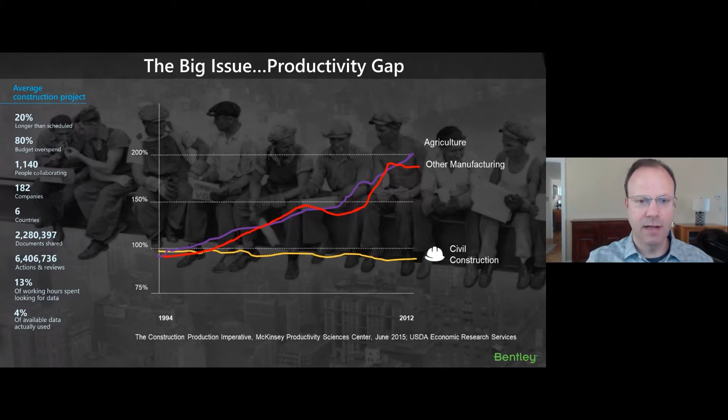Before I get into that, I'd like to start with what are the big problems in construction, specifically the demand for infrastructure continuing to expand. However, the construction industry is really still struggling to keep up, largely due to the lack of productivity we've seen. Many people may have seen this McKinsey slide before, but as it shows, while other industries, particularly manufacturing, have seen step function improvements in productivity over the last 25 years, construction has basically seen no gains. It's clear that much of the productivity gains seen in other industries is driven by new processes enabled through the adoption of technology. So we want to see that happen in construction as well.

If I go a little deeper into that productivity gap for construction, it's driven by three things. First, project complexity, which includes the increase in design complexity, as well as infrastructure projects getting bigger and more complex in size. But also, and maybe even more importantly, while this is happening, there's an increase in owners' delivery expectations. It's not good enough just to deliver more for less, but it needs to be sustainable, accountable, transparent, resilient. And then resources continue to be an issue in terms of labor, skilled labor, as well as materials, and in the heavy civil space, large capital equipment utilization.

And finally, around data deficiencies, which are driven by two things. First, data silos, where we see about 30% of construction companies using applications that don't talk with one another, and also poor data quality, where 90% of the data is not structured, which makes it really hard to search for and unusable for analytics. The net of all of that is, while there's more and more data being made available for construction, only about 4% of that data is currently used, and the average construction firm spends about half a day a week just looking for it so they can do their jobs.

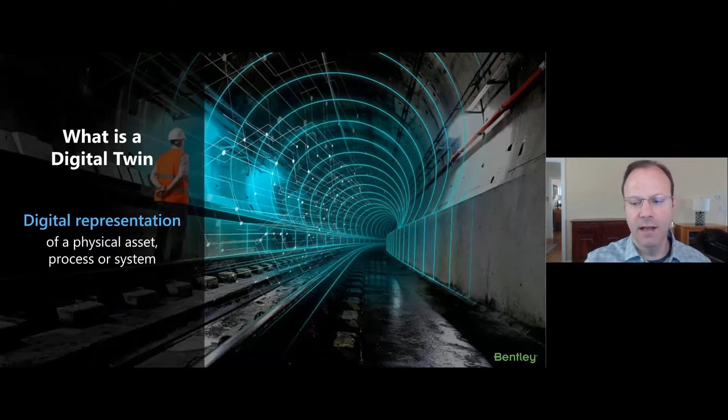Let's start by defining what a digital twin is. There are probably other definitions out there, but the way we look at it: first, it's a digital representation of a physical asset, process, or system, and all the engineering information that goes with that representation, so we can better understand it and model its performance.

Second, once you have that model or digital twin, it could be continuously synchronized from multiple sources, including sensors, continuous survey from the field, and near real-time status, so you can understand what is happening in near real time. If you're familiar with BIM or VDC, this is taking that the next step further and having a live BIM model for construction.

And last, once you've got this digital twin, it enables data-driven workflows, including asset visualization, progress tracking in the field, performance analysis and insights, in order to predict and optimize better project outcomes.

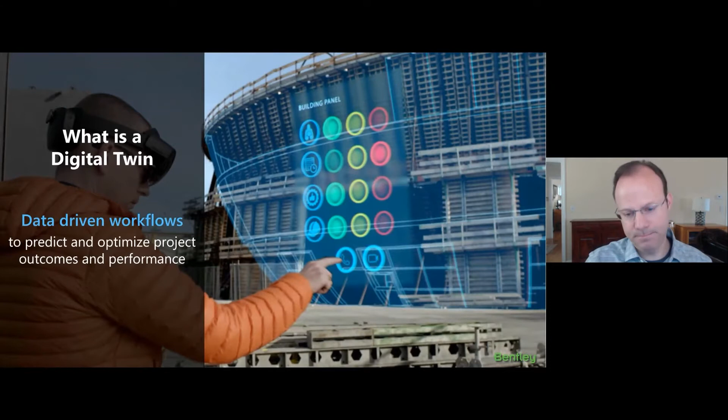So let's start to review how we could use this digital twin, or the construction project digital twin, to solve the problems that we see in construction.

What if a digital twin could help you know where you are in a project by providing real-time data visibility in context, leveraging and providing a single source of truth, so that everyone on the job is on the same page at all times?

And what if it could help us know where we are going by providing capabilities such as 4D planning and simulations, and model-based cost, quantities, and estimation, so that resources can be optimized, risks are mitigated, and projects are delivered on time?

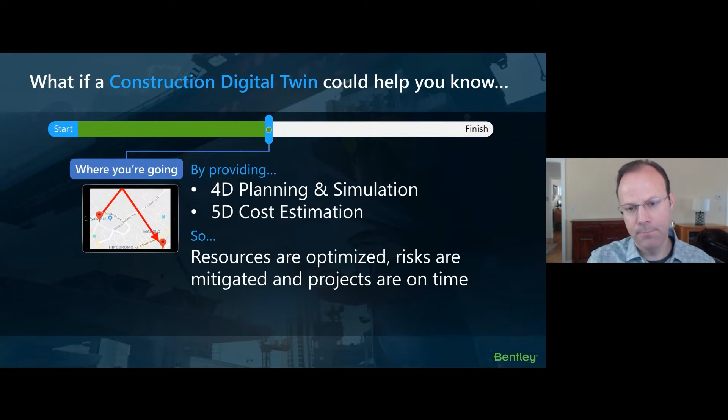And last, knowing that we're going to be able to get there faster by providing operational efficiencies and business insights and intelligence, so that teams make better, faster decisions and get more time on their side.

To summarize that thought, it's really about the digital twin having the potential to transform the way construction projects are delivered. That means providing a continuously updated and live single source of truth for a construction project, and enabling transformative construction workflows such as 4D scheduling, 5D estimating, and machine automation, which I'm going to bring up again.

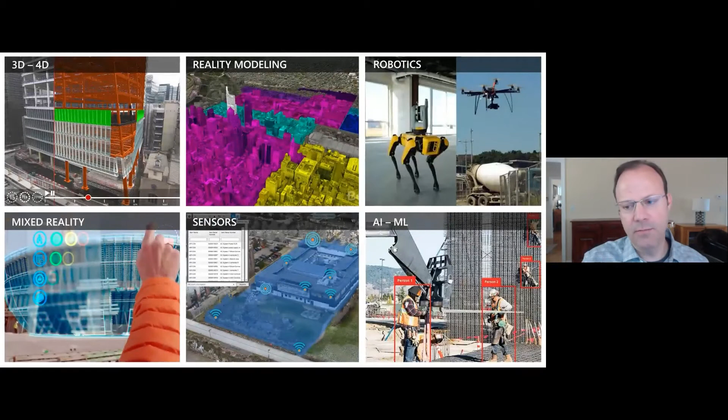So let's dig into how this value is achieved. The digital twin is made possible today because of the advancement and convergence of several technologies.

This includes the ubiquity of mobile devices out in the field, drones, robotics, reality capture, all on the job site, as well as the emergence of technologies such as artificial intelligence, machine learning, the Internet of Things, and mixed reality. When you connect all these technologies with a 4D model, it really enables this concept of the construction project digital twin.

Now that we have the basics of what the definition of a digital twin is and the high level benefits, let's take a step back and look at the full view of what a digital twin really encompasses. First, everyone should understand there's really no one digital twin - there are multiple twins throughout an infrastructure asset, and each twin at each phase has specific workflows that benefit from it.

For example, the design project digital twin includes existing condition information models and the creation of the design models themselves. Doing that in the concept of a digital twin better enables design delivery and collaboration of that work-in-progress process. Obviously, there's also a construction digital twin - I've said it numerous times, but we're going to talk about that a little later.

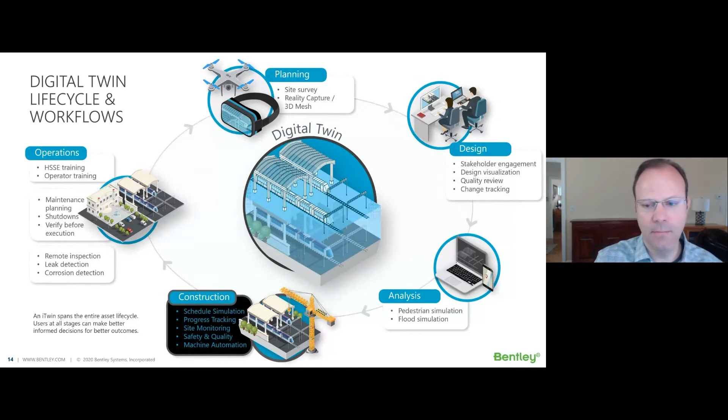So each twin also really works off of the other - the information from one twin, from planning to construction to asset management operations, builds on top of each other. But as I described, I'm really going to focus with that background as the background on the construction project digital twin.

Okay, so now that we understand what the construction digital twin is and its high-level value propositions, let's work through the steps of how do I get there, how do I create a digital twin and then best leverage it.

Step one really involves gathering existing condition model information, typically starting with the design models from the design authoring tools, and aggregating that information, as well as aggregating design model data with reality capture data, and putting that in an accessible data environment. What we would recommend is to provide that in the cloud where it is most accessible.

Step two would be how do we transform this model into a construction model? Typically we would need workflows such as model splitting of objects so that every asset is broken up into constructible components that better represent the way that object is actually going to be constructed.

At this point, if you've done that, the model is ready to be used for construction planning, simulation, and process optimization. Step three, once we have this model componentized for construction, it's all about adding construction attribution data. Context is key if you're trying to execute on the delivery, which would be things like construction work breakdown structures, cost breakdown structures, the systems, and then applying during the pre-construction planning phase, 4D schedule data and quantity information to the model.

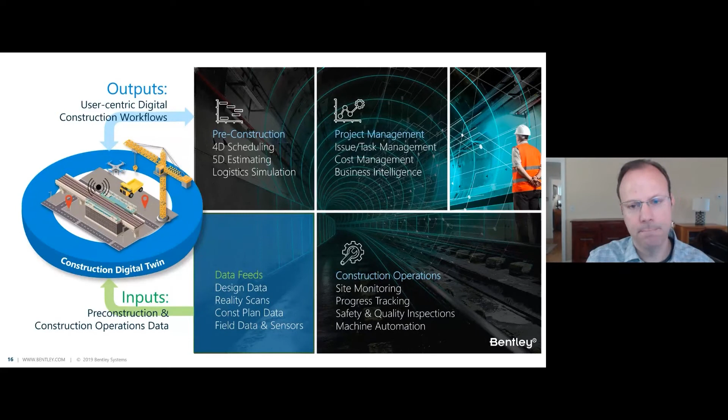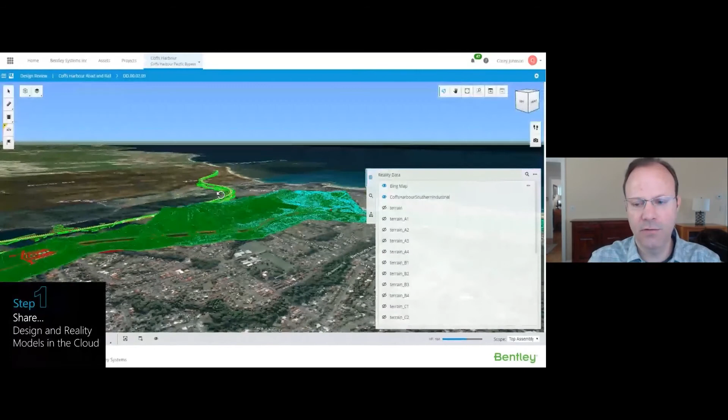Okay, so let's get into some details now and real examples of how we create this construction digital twin. What you're seeing here is step one, where we're aggregating and sharing data in the cloud. For Bentley, that means bridging reality model data and design model data into a database we call the iModel, hosted in a cloud environment called the iModel Hub.

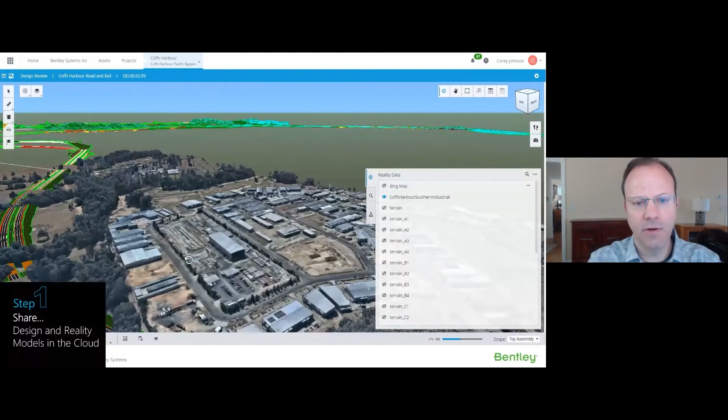In this example, you're seeing a huge civil infrastructure project where you're seeing the design model, photogrammetry turned into mesh models, as well as point cloud models, easily viewed in a web-based model viewer, streaming live from that iModel Hub cloud database. It includes not just the geometry, but all the engineering data that came with it.

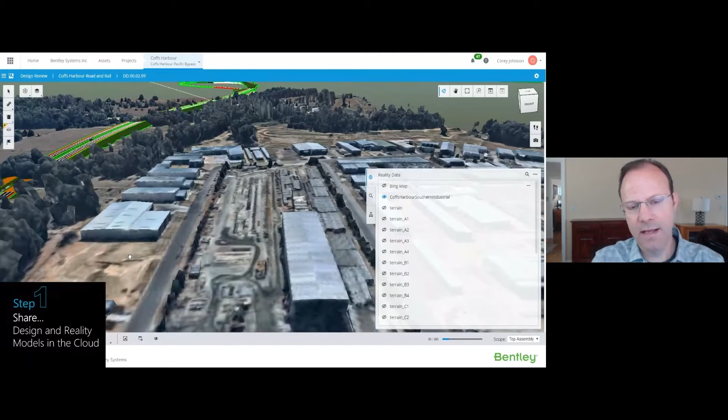So I want to take that aggregated, shareable data now and turn it into a construction model. In order to take that design model into construction, it needs to evolve. The example I'm going to share is a product we call SYNCHRO 4D, construction modeler.

It's a new solution that provides, in this case, a really simple viewer that shows the aggregate model information in a simple interface, meant not for someone who's familiar with doing CAD and BIM model authoring, or a specialized VDC engineer, but any persona, non-CAD BIM professional, can use in order to take the steps necessary to evolve into a construction model.

The first step is creating these constructible components by splitting solid and mesh model objects by phase, systems, or the means and methods that are critical to construction. We're going to show this use case as a civil project, because that's where we see some of the most significant problems.

If you're familiar with civil design authoring tools, model objects such as a long linear corridor roadway or barrier wall come in as one long, large model object. It is nowhere close to the way it's going to be built. So the ability to split that up is critical, versus we see a lot of 4D modeling, for example, in buildings or industrial plants, where a lot of the model objects, like doors and windows, they know what they are and they're already in their constructible state, and data can be applied to them. I'll also show in this use case how in this environment we're able to apply construction attribution.

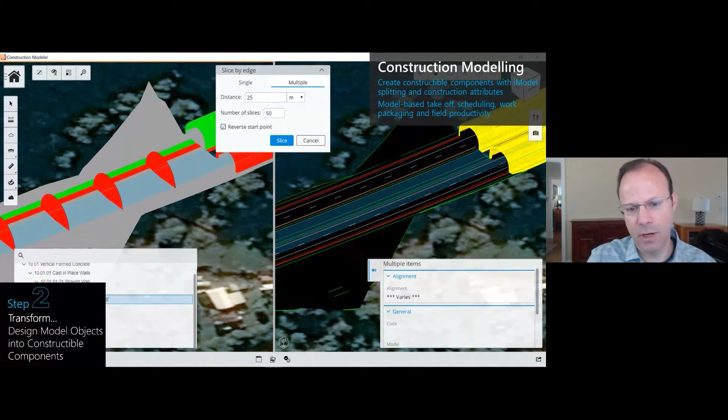And ultimately end up with a model that enables downstream workflows that I've been talking about, such as 4D scheduling and work planning. But in this initial scenario, as I get to it, it will be how do I do quantity takeoff based on the model.

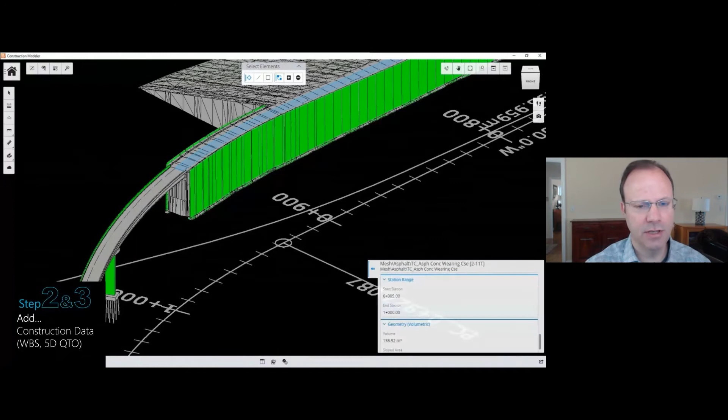So what you're seeing here is a typical civil model brought in, and I can interrogate it in this simple environment, select model objects, see the engineering attribution that came from the design authoring. But now I want to be able to pull in a typical construction firm's work breakdown structure. So in this, you can do 6-7 levels of detail in that work breakdown and apply it to the model object.

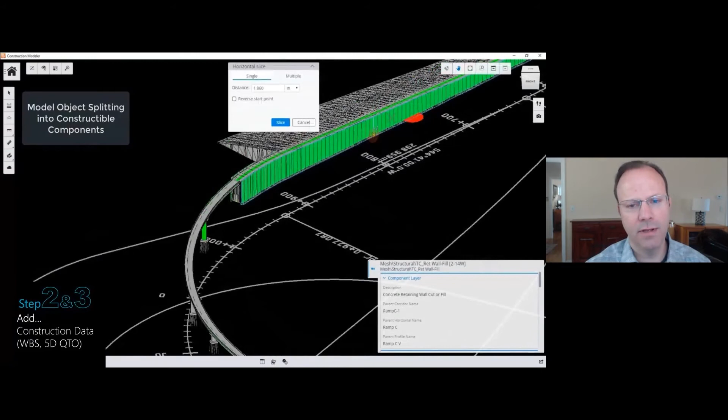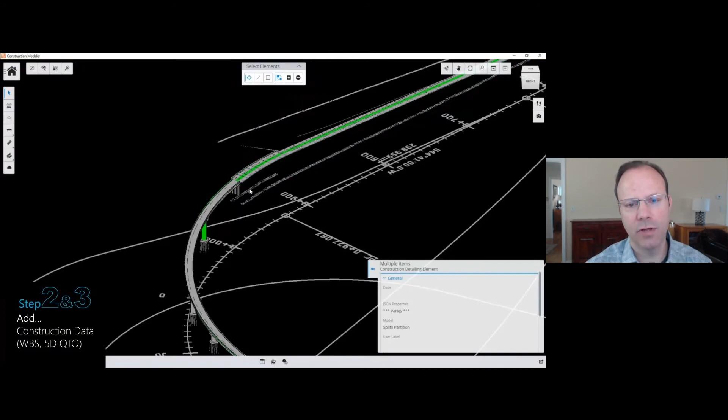So that's interesting, but I want to split. That's, for example, in this retaining wall, this is not the way I'm going to build it. It's going to be built in, say, 2-meter lifts, concrete pours. So I'm able to quickly split the model, and now I have a number of lifts, and each one of these is its own model object now that is related to the parent object that was in the design model.

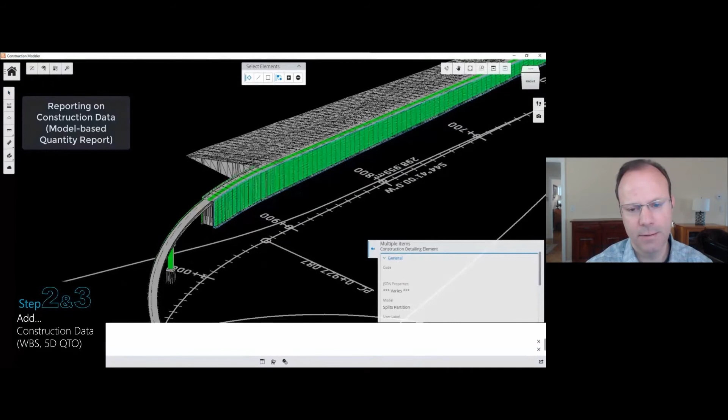As you can see in this cross-section view, the new splits, new model objects have come through. And they're each children objects, again, of the parent with their own identification and all the information from the parent, the engineering and the new work breakdown structures and cost codes and quantity information came over with the parent.

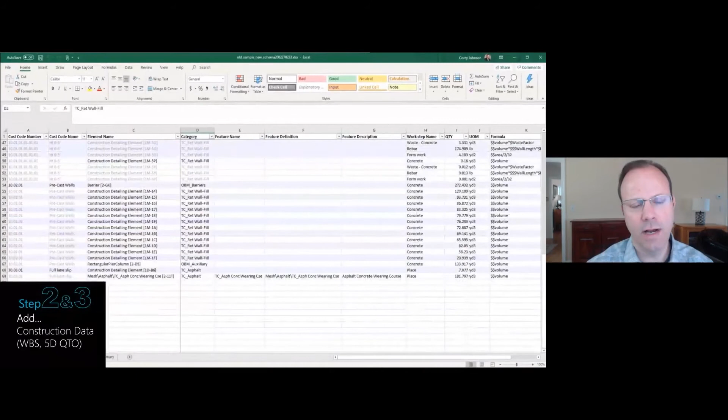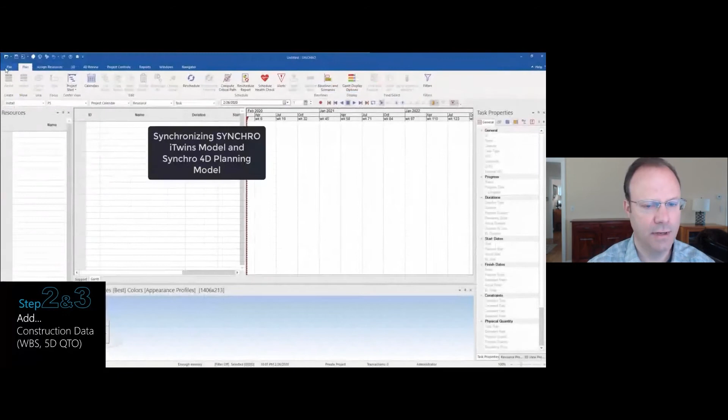So what you're seeing now is just the ability to report that quantity report in either summary or in its full glory, both in the application and here shown in an Excel spreadsheet. So they can use it to pull it into say your purpose-built estimating program. What we're also showing is how we link that data to other solutions in our portfolio and across other vendors' software.

But the next step would be, okay, so now I've got a fully loaded construction model that's componentized for me, and I want to also be able to apply schedule data.

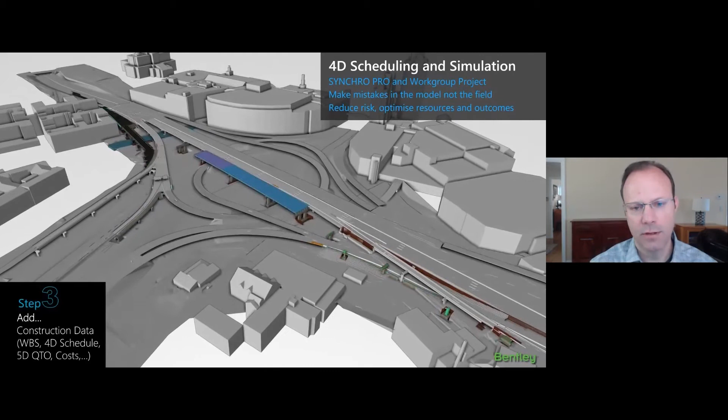We're used to seeing 4D modeling tools. In this case, this is another application within our SYNCHRO 4D environment that applies a schedule either built in the application or pulled in from other applications like P6 or ASTA or others, so that I could do scheduling against the model and then simulate, as shown here, how my sequencing and staging is going to happen. So that allows me to better optimize my schedule and resources and make sure I make mistakes virtually versus when they happen in the field.

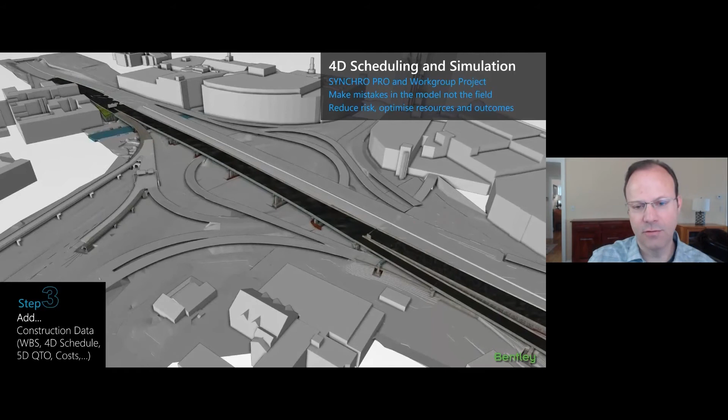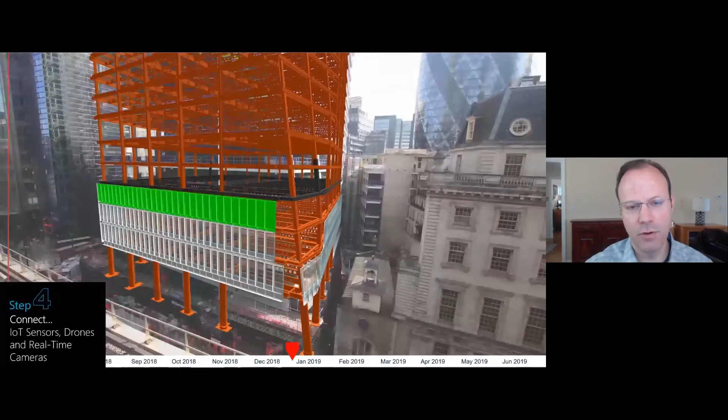The next step is to tie the 4D construction model to live feeds, as we've talked about, making it a truly live model in a construction digital twin. In this example, we have a 62-story building that was under construction in London, where they merged the 4D model with the orchestration of work areas, logistics, and the schedule with the live site camera feeds.

So the result, as you saw here, was the analysis of how the plan was doing in comparison to the actual results. We saw a history here, but you can imagine a scenario where I'm seeing live, I'm comparing the plan against live feeds in real time, and how that might impact the way I do work and make decisions out in the field and continue to plan.

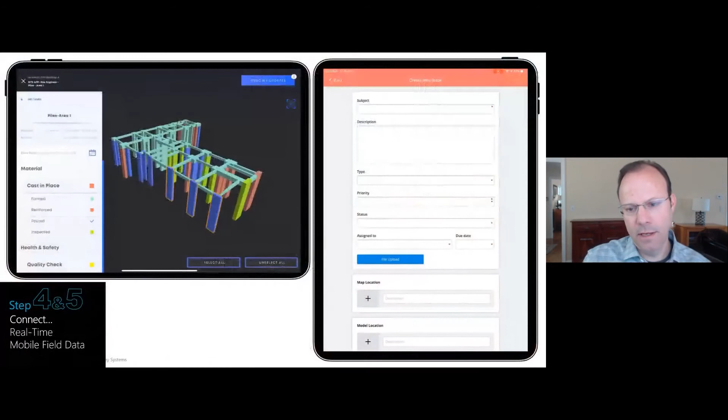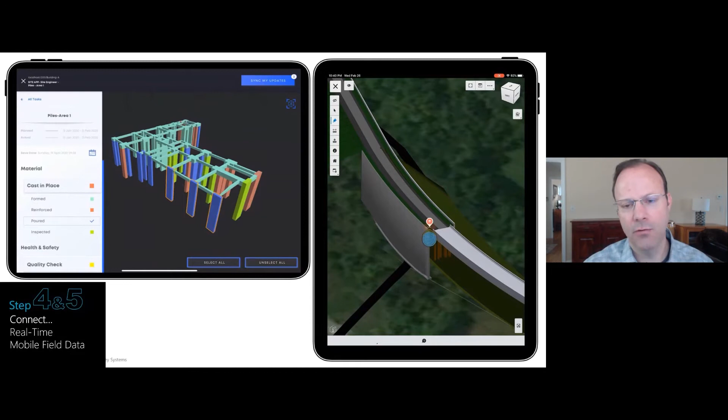And another example of tying near real-time feeds is the use of mobile applications in the field to capture data in the context of the 4D digital twin. So on the right, you're seeing a SYNCHRO Field mobile application where you're basically doing inspections and issues to capture in the context of a form or a map. But here we're also showing it could be all those tasks can also be captured in the context of the model out in the field.

And so that was a quick example of how do I capture the issue and reference it to model space and geospatial location, as well as the model object itself.

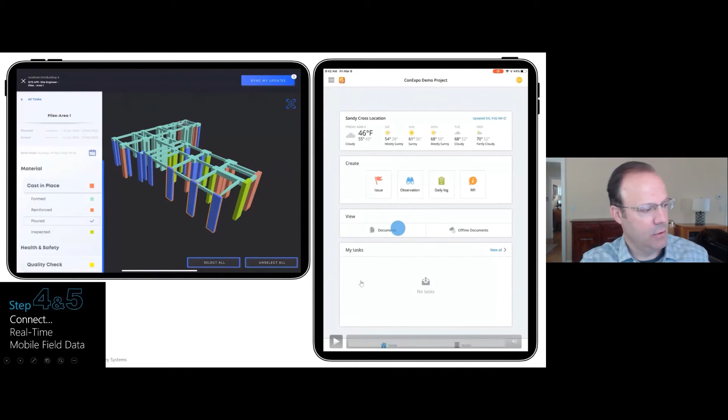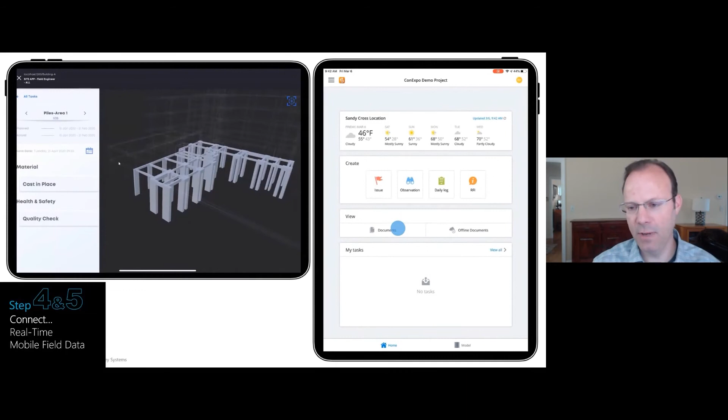Another example would be how can I use the model, in this case on the left, a building example, to do progress tracking in real time in the field. So a field user can orient themselves against the model, search for the model objects that they are either inspecting or doing a progress status check on, and then quickly change the status of that model object. So now I've got live feeds coming from the field in an easy environment for the field user, but it also is all stored in the cloud and visible in, say, a web project management system as well.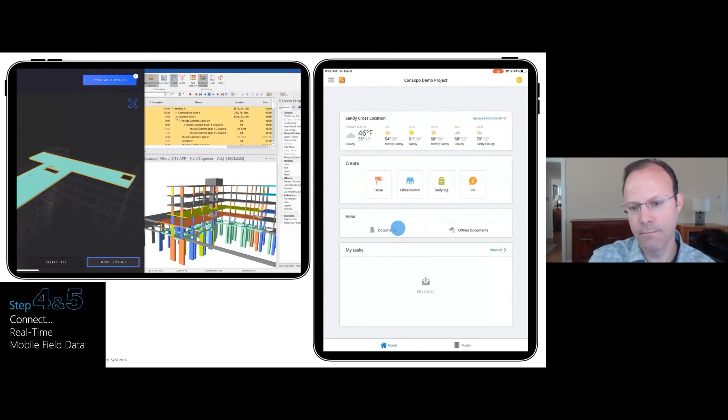So again, some of the final steps of realizing the value of this construction digital twin is the insights that we get in the project visibility and analysis, and the different views that I can capture in terms of looking at that data either in a 4D model view, augmented reality views, or virtual reality views. And in this example, the model again is being leveraged to investigate alternative scenarios in terms of my construction planning.

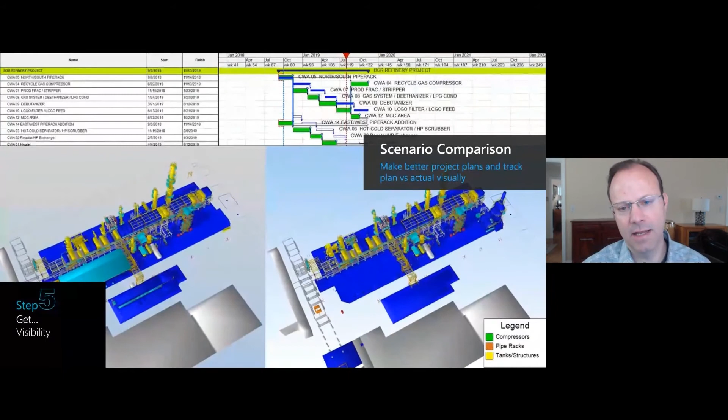But again, I can be back in the job, back in the office, viewing the data that I captured in terms of progress from the field and comparing the plan versus actual, and seeing my Gantt chart in real time here. So again, the benefits of this are, if I can see what's happening in the field against my plan, I could take action against that much more quickly and keep my project in control, on budget, and on time.

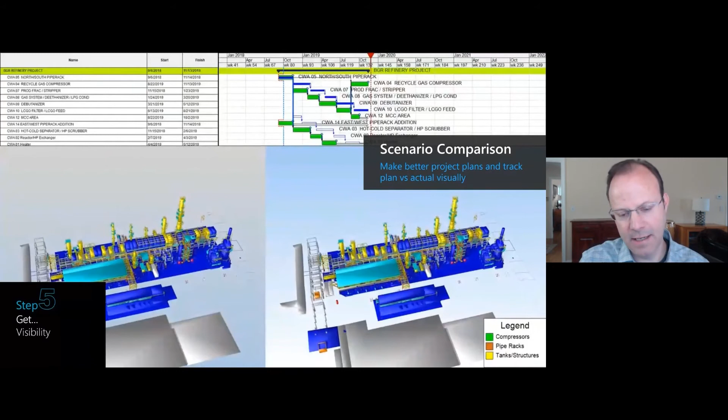And then this is just a quick example of some of the staging simulations that you can do if you had a 4D model and digital twin, to do rehearsals with crews before you actually try to do a complex logistical operation.

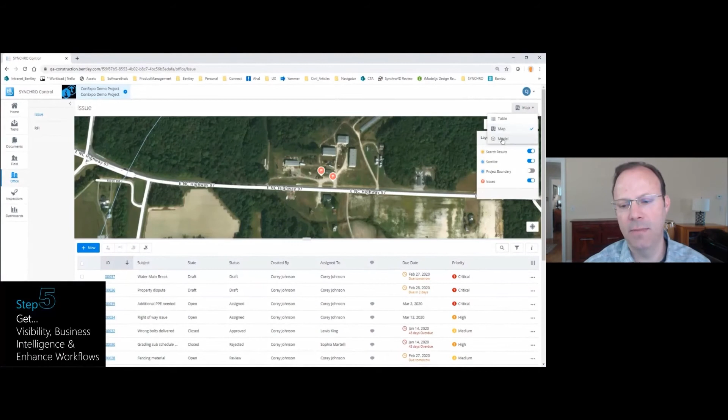And if I can move on, the digital twin can also be used as context for project management and managing most construction tasks and even administration tasks. In this example, we have a project management web service, but it has the ability to access, manage, and create data in the context of the 4D construction model as shown here.

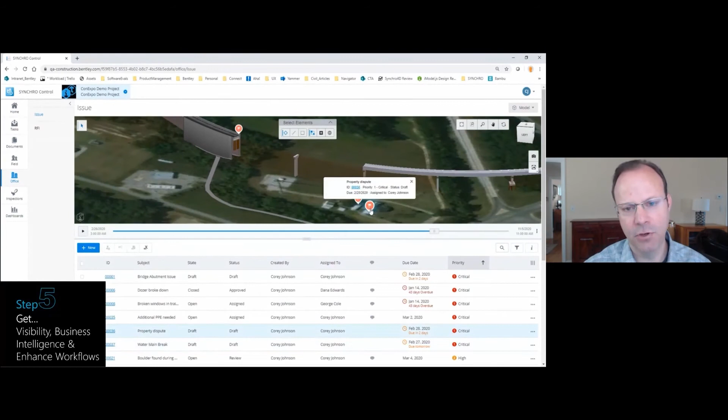So I'm now able to enhance my project management workflows, but also enhance the way users can access the data. So I'm more quickly able to find information I need based on selecting an area of the model and going to, since it's a 4D model, going to a specific point in time and just seeing the issues, RFIs, change orders, inspections, and other work plans and tasks in that context.

And here we're showing the example of, even if I'm on in the web environment, in the office, and I'm virtualized, I still can assign issues and tasks directly to that digital twin in context of that digital twin model space or the object itself. So a really compelling way to transform even project administrative workflows.

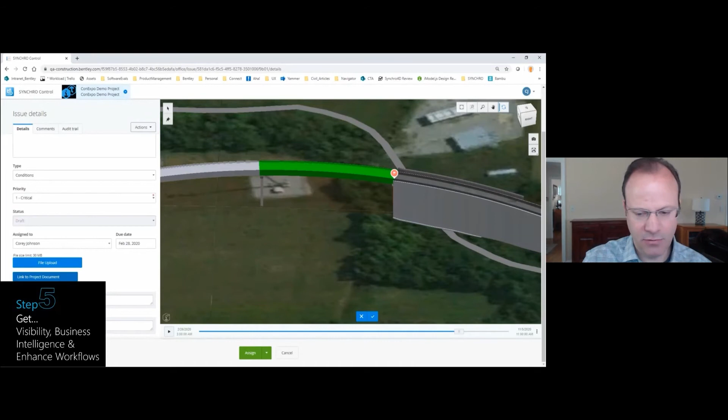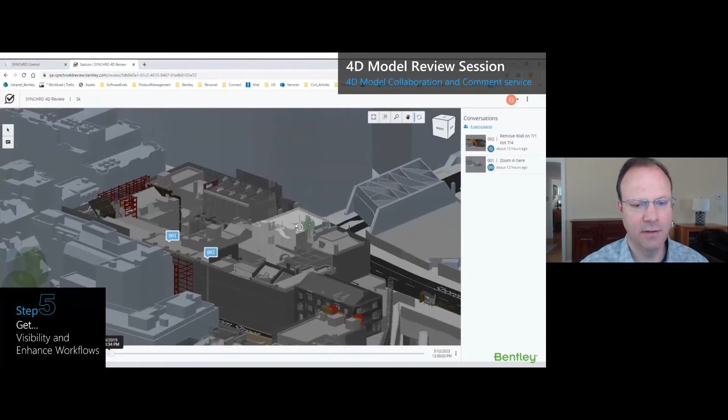And then in this example, just a little more detailed demonstration of the scale at which we can interrogate construction models. So in this case, we're seeing all the context of the entire city in which the project is being done. But I'm able to interrogate that model, that 4D model in that city context, and then be able to move basically you're seeing the time slider on the bottom, be able to move the simulation back and forth in real time.

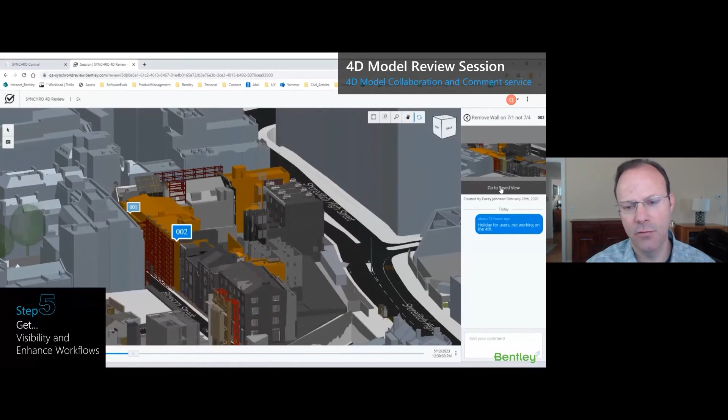But I'm also collaborating and streaming live over the cloud, so I can have multiple users participating in this kind of construction review session, and commenting in real time against it, and doing basically live chats and storing that stream and comments live. So this could be comments, but again, it could be those comments can be issues. We can also add RFIs and track other information in a real-time session as a collaboration.

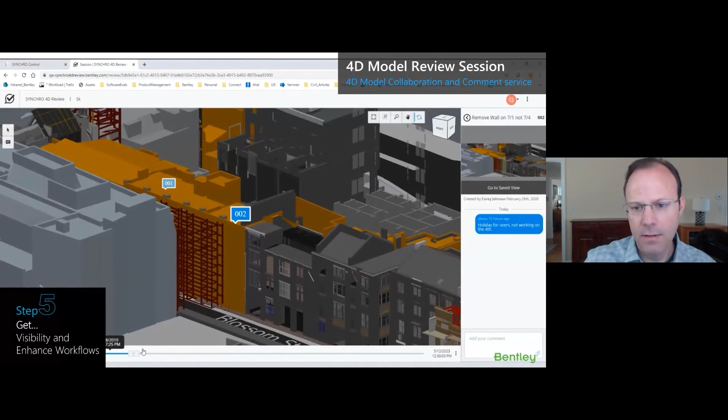And then again, if we move on to things like machine learning and automation, we can actually train the software to detect information in the model. So if I'm doing, say, reality capture and I have a mesh, I can do not just photogrammetry detection of, say, in this case, equipment or machines, but I can actually do that same level of detection in a complete mesh. So I can understand what's going on in the project, and in this case, maybe detect equipment moves, but also detect new surfaces and do volume calculations, so I can track progress in real time.

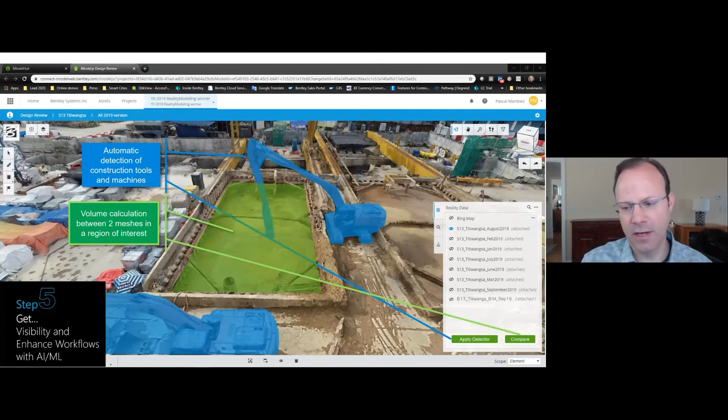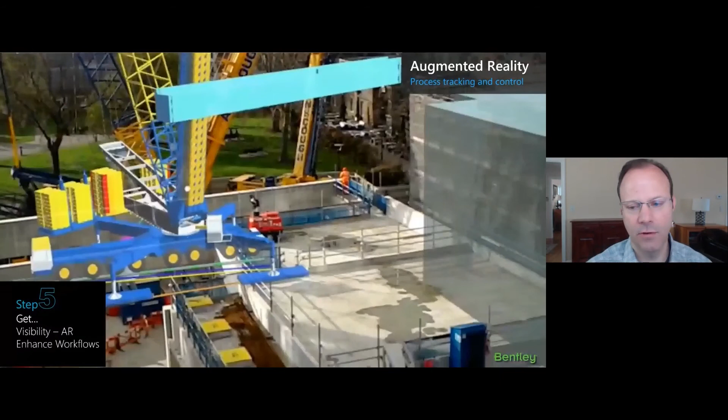Using machine learning. And so I guess one of the last things I want to leave you with is the experience of and the ability to take the data into the field, that digital twin into the field through different devices, not just say a laptop or a tablet or iPhone, but also leverage things like the Microsoft HoloLens to do mixed and augmented reality. So in this example, what you're seeing is I'm on a job site with a HoloLens, and I'm seeing that 4D digital twin simulation overlaid on top of reality.

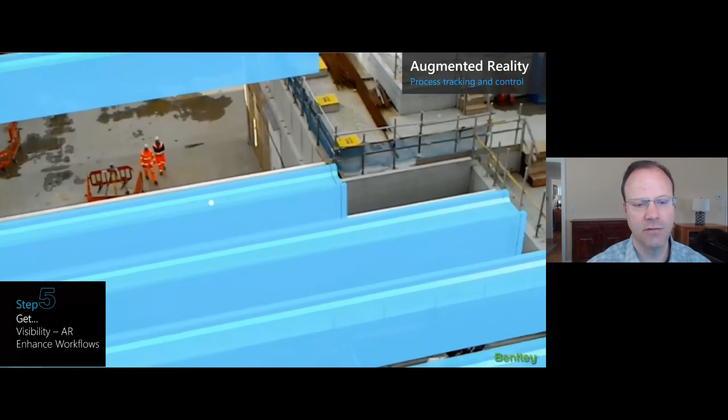This is really useful when you're trying to coordinate logistics and see where you are in terms of progress against your construction plan, and whether there are any issues you'll find as you move forward with your operations. I hope these examples show how to deliver the benefits of a construction digital twin, and all the technology is available to you today to deliver that.

For Bentley, we do that through Bentley's new SYNCHRO construction portfolio. So let's take another couple minutes to take a closer look at that SYNCHRO portfolio, whereas most of the examples I showed were from this technology.

It is really Bentley's latest construction portfolio as shown here, meant to be a broad set of integrated construction solutions, leveraging Bentley's core capabilities around data management and 4D modeling. But the result is the ability to deliver field management solutions with native mobile applications.